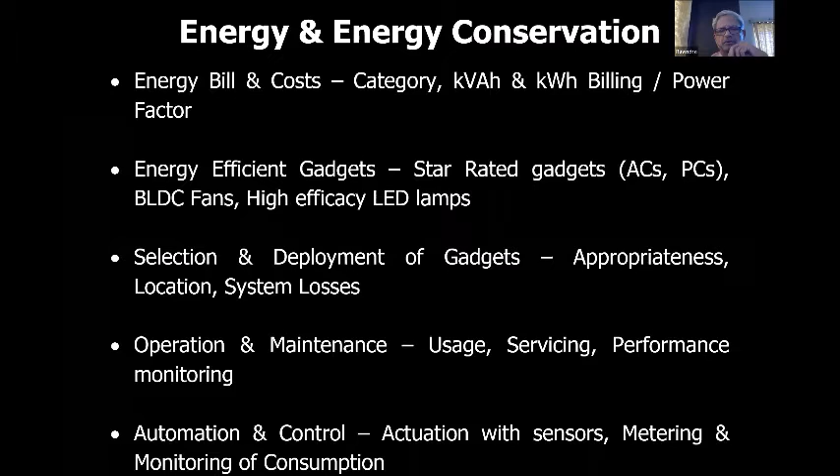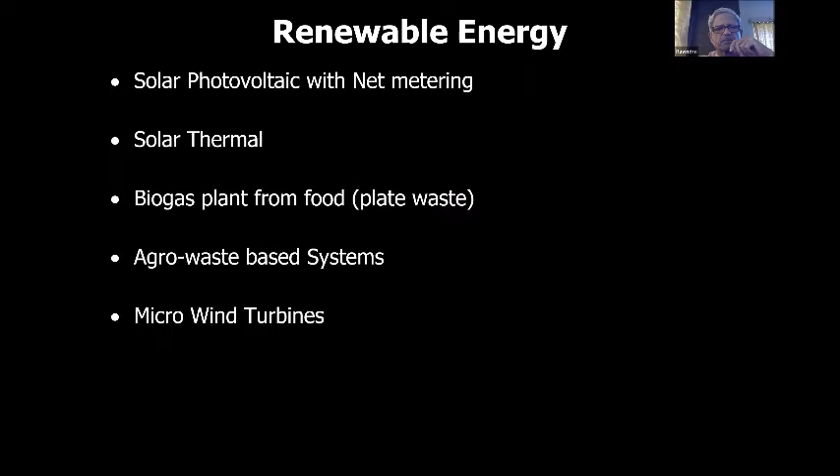The second part will be renewable energy. What is commonly possible for colleges, especially the smaller ones, is solar rooftop, solar photovoltaic. So we'll see that in a bit of detail. Solar thermal also is possible, but there is hardly any hot water application in colleges, but that also is an area which can be explored. Then we have biogas from food waste, agro waste based power generation or other systems, and micro wind turbines.

Then we'll see water and water conservation. Depending on the source of water, we need to have a proper purification system. We also need to check drinking water quality and arrangements. So we'll see that in some detail. There are a lot of gadgets available which consume less water.

Now, I'll tell you, there are some faucets available which consume just 2% of the regular water for hand washing. They're available on Amazon, costing about 1,500 rupees or something. But it is with a mist. It has a special nozzle which generates mist, and the entire hand will get wet with a very small quantity of water. You can also see the videos; those are available. I can also share that individually if somebody is interested.

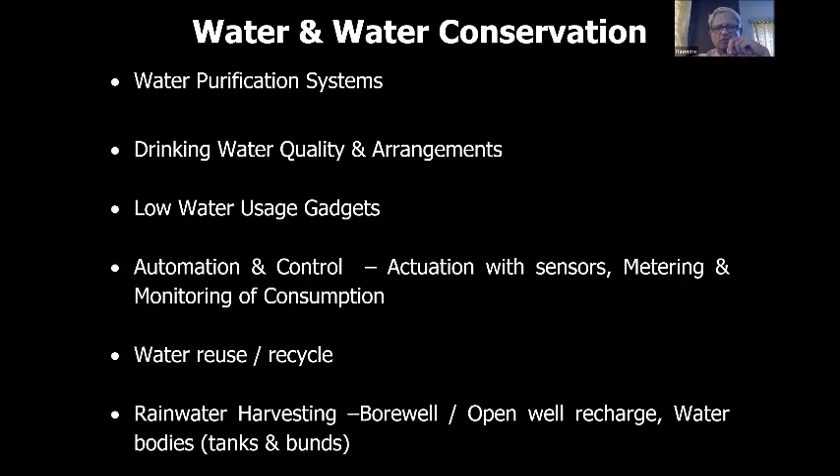The next part is automation and control. Similarly to energy, we can do it with some sensors, maybe for flushing, maybe for tank filling and other things. Then reuse or recycling of water. That is another area which can be looked at. The last one is rainwater harvesting. There are multiple possibilities available with which we can harvest rainwater and contribute to overall environmental improvement.

The environmental management aspect will have air quality and ventilation. Basically, this is for closed spaces as well as open areas, indoor and outdoor. The primary parameters are temperature, RH, CO2, VOC, NOx, SOx, SPM. The second aspect is illumination and lighting, mainly indoor, but also for roads and pathways, especially if it is a big campus. For smaller institutes not operating during nighttime, it doesn't make that much sense. But now many colleges have evening classes also, so that is an area where we need to look at illumination and lighting.

Now here I would just like to add one thing: in general, Indians are comfortable with lower illumination levels. If you see international standards and norms, even Indian standards, they talk about considerably higher lux levels than what we ourselves are actually comfortable with. So norms are more on the higher side. We are comfortable with lesser lux levels, and probably that's how it has been maintained also.

The third aspect is noise and sound level. Then general neatness and cleanliness, greenery and water bodies. Again, this is more relevant if you're talking of a campus. If it's a single standalone building, this may not be as relevant.

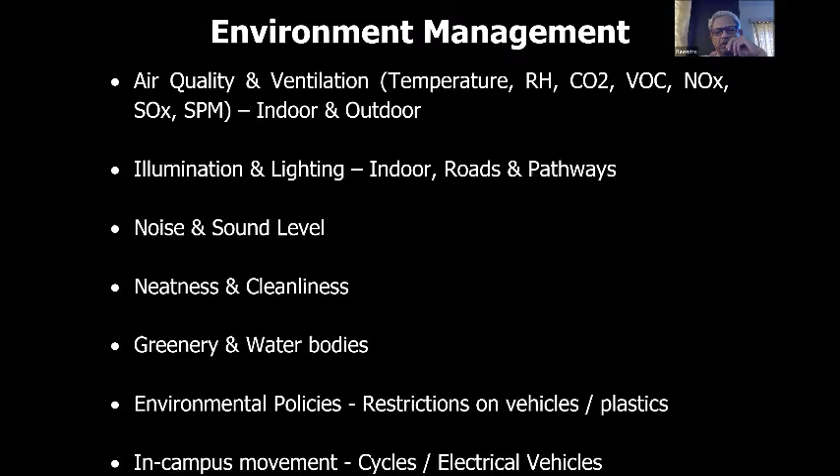Then the environmental policies followed in campus by the college, like whether you have a restricted entry for vehicles in some of the area, you don't use plastic, ban plastic in campus, or such kind of thing. Then whether in campus, if the campus is big, maybe you can have cycles, only cycles are allowed in specific areas, maybe electrical vehicles are allowed. Or maybe electrical vehicles are provided by the university or college, so that the staff or people do not use their own vehicles or rickshaws.

The other green initiatives that have been taken is whether you have a paperless communication, then whether we have got any awards or rewards, because there are now a lot of competitions, or there are a lot of areas where this kind of thing also can be seen. Then what are the environmental promotion activities undertaken by the college in-house and beyond, like for the public or society?

Then comes basically waste management. Now waste management is not much of a gaseous waste. Waste can be of three forms, either liquid, solid, or gaseous. So colleges normally will not have much of a gaseous emission because there's not much of a production going on. Apart from small labs, or maybe in some cases you have a pilot scale activity, a small quantity of gaseous waste effluent may be generated, but more or less it will be solid or water.

So there are 4 R's. We'll see that slightly in detail: review, reduce, reuse, and recycle. Then segregation and wastewater treatment. It is very essential to segregate the waste. We'll see that in detail. But basically, if you segregate at source, it becomes very easy to treat. If it is mixed and then goes to a larger volume, then it becomes a nuisance, like what we have in Mumbai.

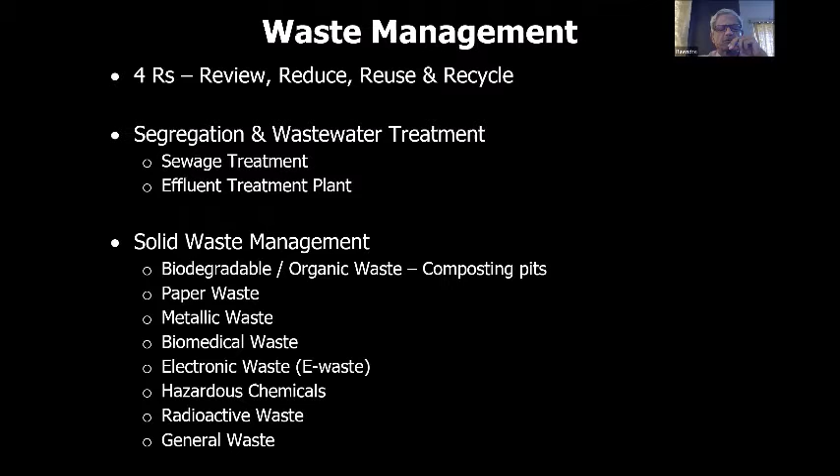So segregation and mitigation at generation or source is the best way of treating the effluent. So that way we will see for water as well as for the solids. And the last is infrastructure and safety, that is in-campus movement, entrances, whether from the safety point of view entrances are accessible, and wide enough for emergency evacuation. Similarly for staircases, pathways, then landscaping, this is basically a mix of everything.

Firefighting systems, this on safety side. Then whether we have any major safety manual, operating procedures, do you carry out mock drills, then building condition, general security and fencing. So these all will be covered in the course of our presentation. And this is basically a part of the green audit report, what is prepared and what is actually expected by NAAC. So we'll start with the energy conservation and energy.

As I said, basically we'll see the bills and cost first, because that's where ultimately we are all interested. Now, when I mean energy, mainly because we are consuming electrical energy, we'll focus more on electrical, because fuel is really very small, maybe for canteen or something. And for that, we only have to have a trade-off between cost and convenience. If you go for LPG, it's most convenient, most expensive. If you go for furnace oil or coal, it is not convenient, but it is cheaper. So that is where we have to have a trade-off of cost and convenience.

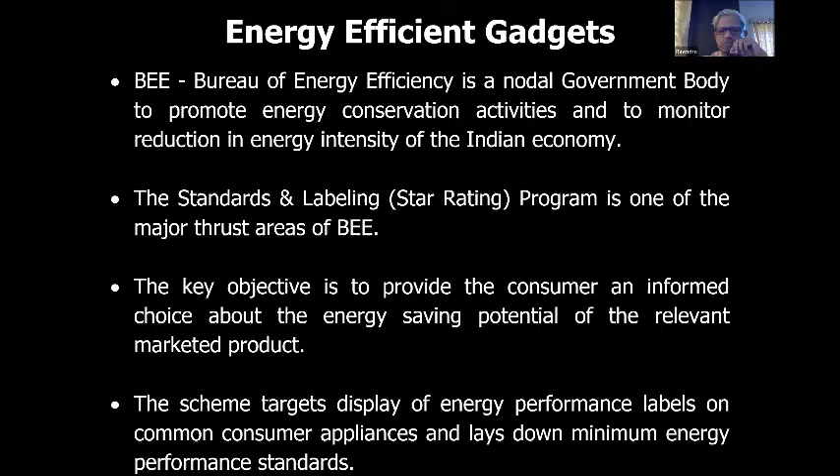So as I was saying, we should do the life cycle cost analysis. This is very essential when we are buying any machine or any gadget, because buying a slightly efficient equipment is not going to cost that much higher compared to the saving it is doing. I'll just give an example. We just take a case of split AC, 1 star versus 5 star. We are operating 10 hours a day and 250 days a year. This is a figure; you can change the values accordingly and the saving will change. Useful life of the machine, you consider 10 years. So for 10 hours a day, it will run 250 days in a year, for 10 years it will give service.

Now, whatever maintenance cost or servicing cost is there, it is going to be the same for both machines, whether it's 1 star or 5 star; it is not going to cost you additionally to service the machine. So I do not consider those costs. Power cost is 8 rupees. It will keep on changing, next year it may be more, but let us consider 8 rupees as a standard cost over a period of 10 years. So the cost of machine is 20,000 for 1 star and 25,000 for a 5 star. Now the difference is 5,000 rupees.

Now when we are buying, if we don't get a star rating label, we may not bother. Why should we buy a 25,000 rupees machine? We should buy a simple one. It is costing less, it looks equally good, it is from the same company. And mind you, these star gadgets are made by the same company. It is not that only Daikin will make 5 star and Voltas will make 4 star. Voltas will make 4 star, 1 star, 2 star, 3 star. Daikin also will do that because they want to cater to all the market. There are people who want to buy a cheaper one, and people who want to buy an efficient one. So each manufacturer will have a complete range of products.

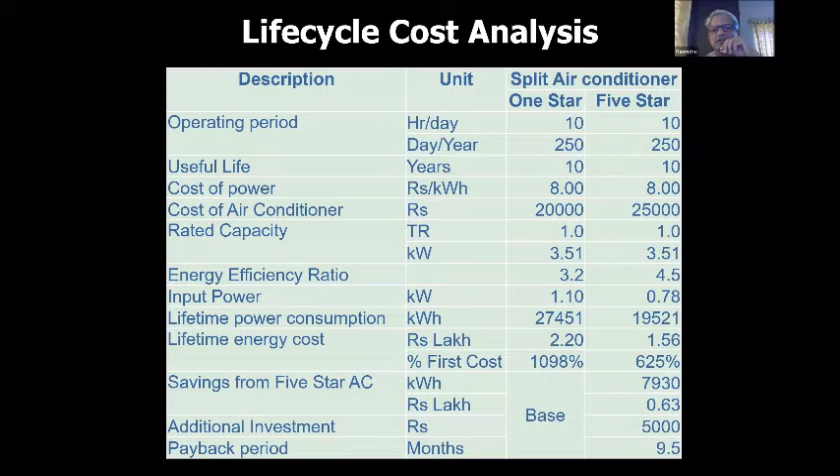You can still buy a one-star machine after doing all this, but then it is your informed choice, knowingly done: okay, I know I'm going to spend so much more, but I don't know whether I'm going to use it 10 hours for 10 years or not, so I still want to buy one star. You can take a decision, but this is with knowledge. It is not a decision by ignorance. It is a decision by a learned person. That's why the BEE star rating one needs to see when we are buying anything.

Now this is available for many of the products, but I have listed down which are relevant to us. These are mandatory. When you are buying lamps, refrigerators, air conditioners, geysers, TV sets, it has become mandatory that the star rating has to be done. The product cannot be sold without star rating. Even if it has one star, it is okay, because one star also has a minimum value. If the efficiency is below a lower threshold value, it is not sold in the market. It is not available in the market.

So these gadgets cannot be sold without the label. And you see now LED, like people say, okay, we are going to buy LED. Now there are a lot of companies, the locals are there, Chinese are there, Philips is there. Now, how to differentiate? So when we are buying a lamp, the differentiation can be based on what is the efficiency of the lamp, what is the star rating, what is the lumen output per watt. It's called efficacy, lumen per watt. That is all available now with the label.

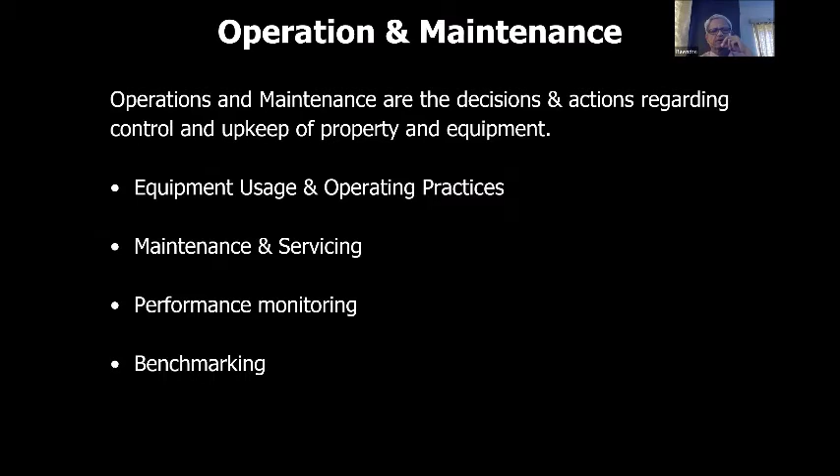How much is it consuming and how much should it be, compared to yesterday or compared to the same period last year? What is the consumption now? Is there any variation? Is there any increase? Because any deterioration in equipment or any system will lead to more energy consumption, which ultimately will be seen in the billing. This is why metering and regular monitoring of consumption is essential. And it really can help in a big way.

Now, I'll just give a small example. We did an audit for a corporate house. The entire building had a centralized air conditioning system, and the normal office timings were 9 o'clock in the morning to 6 o'clock in the evening. As part of the audit, we had an energy meter installed on the main incoming, and we carried out 24-hour logging of the power consumption.

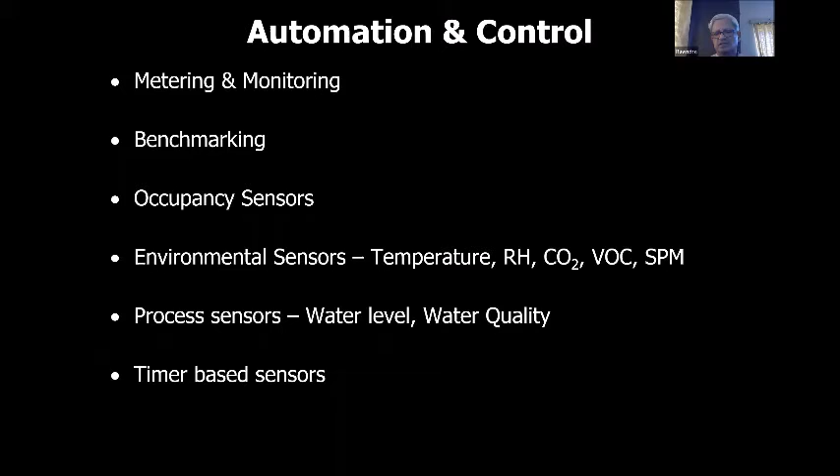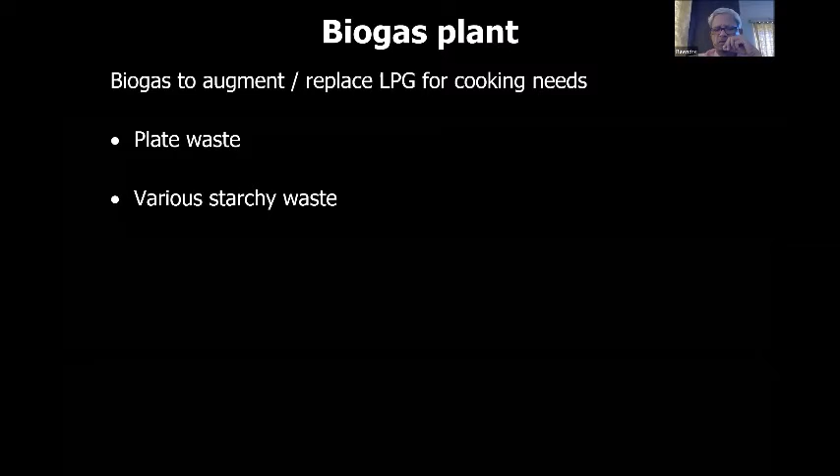But in case it is there for whatever reasons, then biogas becomes feasible. Otherwise, biogas is not recommended here. This is also basically for huge, big campuses. We do not have it for regular colleges.

And this, being renewable energy, will also qualify under that category. You can also make charcoal from these dry leaves. There is a process through which you can do that, because it has a good amount of carbon. So charcoal also can be done. And if this agro waste is really huge, power plants are also available, but a power plant is not something for colleges.

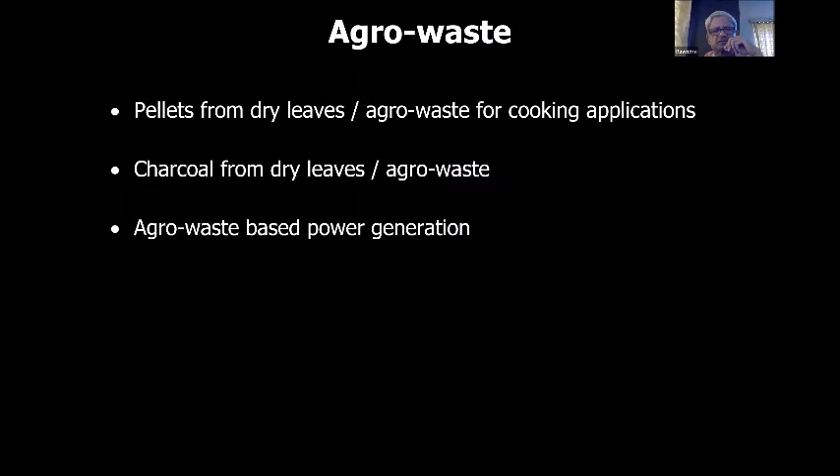There are micro turbines available from 1 kilowatt to 10 kilowatt, or even smaller, but they may not be economical unless there are specific applications where you need only 50 watt or 100 watt. Then those turbines make sense, because smaller the machine, the economic payback becomes more and more.

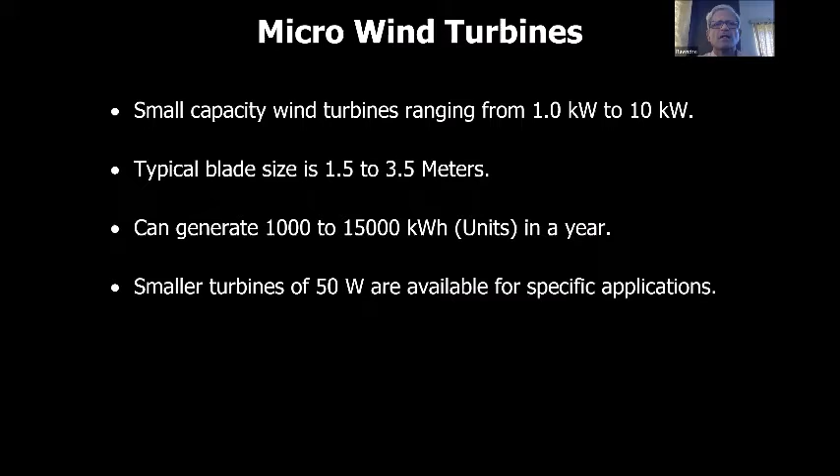But people have that concept of green buildings and all. They think of having this micro turbine on the terrace, so that some power gets generated and your overall carbon footprint is reduced. So for them, there are 1 kilowatt to 10 kilowatt, 500 watt, 400 watt options also available, but the blade size is 1.5 meter to 3.5 meters. Typical generation could be 1,000 to 15,000 depending on the capacity and wind velocities. This is also not very attractive, but this is one area we can consider.

The next is water and water conservation.

Water purification is the first thing they consider, what is the quality of water. That's one of the areas where we need to focus, and purification will depend on the type of source.

If you are having municipal water, like Mumbai, now they have declared that Mumbai tap water is safe for drinking. Although many people have their own reservations, more or less it is quite good and can be directly used for drinking. But other municipalities may have some TDS higher, or some other reason. So depending on from where the water is coming, the purification system will depend.

Now the major impurities include microorganisms like bacteria, algae, fungi, viruses, pyrogens, dissolved inorganic compounds, that is what we call TDS or dissolved salts. Then dissolved organic compounds, this is basically in very small traces, but they are equally harmful. So we have to have removal of organic compounds.

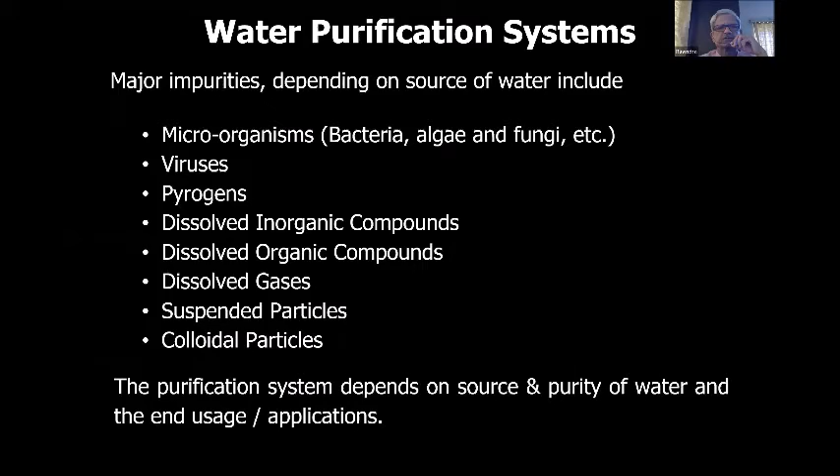The second is the drinking water quality and arrangement. Now, normal water and drinking water, of course, you need a better quality. So maybe you have RO purification system. So what is the system for drinking water? Then the accessibility and availability of drinking water, that also is a part of the green audit initiative, whether students have to walk a lot or maybe the water is not available at convenient locations, then that also need to be addressed.

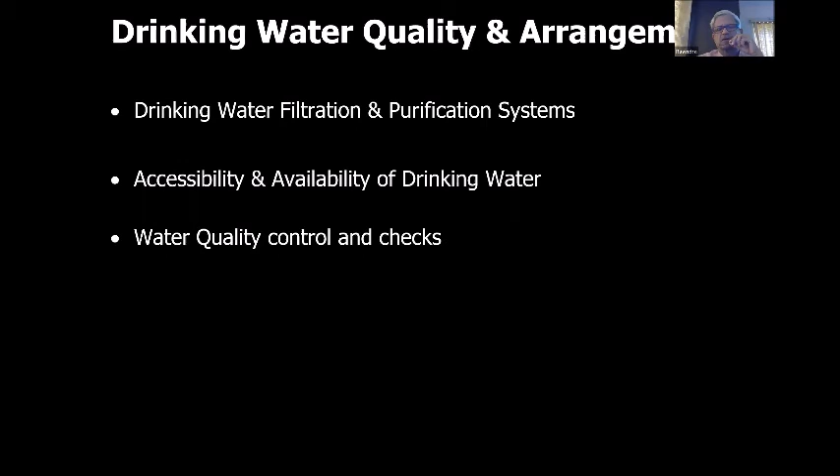And control and checks, as I said in the earlier slide, periodically we need to check the quality control. What is the water quality of the incoming? What is the quality of the drinking water? So that water quality is maintained.

Another part of low water usage is you have to go for low usage gadgets. There are a lot of water gadgets available which consume less water. As I said, even there are low flow toilets available which will consume 30 to 40% of the normal water. And mind you, toilets and flushing is one of the major consumers of water in any common facilities. I've seen some college audit reports where toilets consume almost 20% of the water, whereas urinals consume 10 to 12% of the total water.

So there are waterless urinals also available. They are a bit expensive. Maintenance is more, but that aspect can be seen. And as I said, for the basins and faucets, there are a lot of fittings available, and there is a continuous improvement in this area, which can reduce the water consumption.

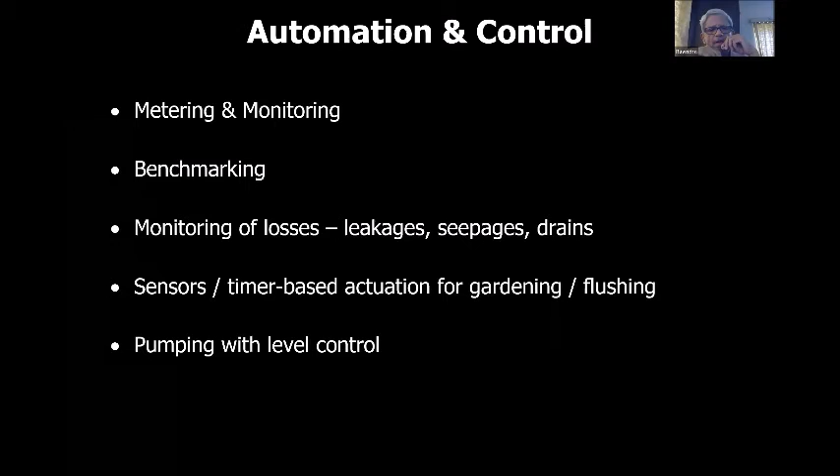Then there can be sensor-based or timer-based actuation for gardening, flushing. That is also possible. That is something which will save on energy and water. Pumping with level controller, that I said earlier.

Then there is reuse, recycle. This we'll see in waste also, but reuse is basically without any treatment. You can reuse that water without any treatment; that is reusing. If you treat and use it, then it is recycling. Recycle paper, recycle water. So if you send water to the STP, sewage treatment plant, and after that you use it for flushing or gardening, that means it is recycling.

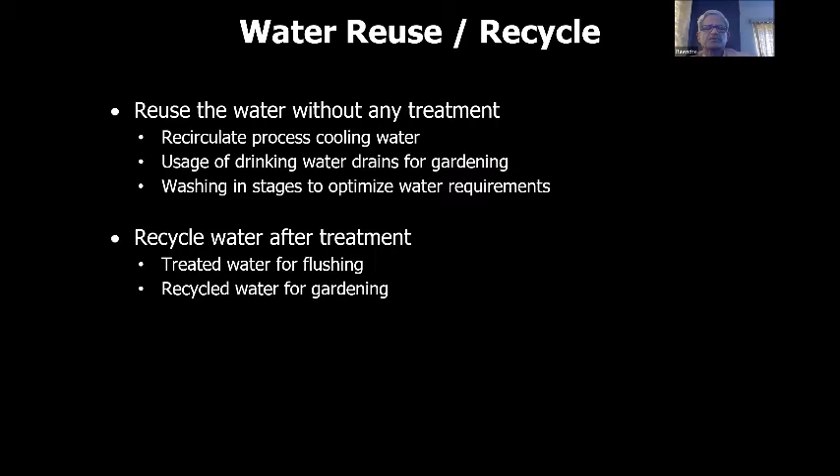But if you just collect the drain water or maybe water from the cooling, you have some small application and use it for gardening or anything, then it is reuse. You're using water which is already used somewhere; instead of throwing it, you're using it for some other application. That is the difference between reuse and recycle.

Then rainwater harvesting, this is not as relevant to Mumbai as to other areas. In Mumbai, 10-15 feet below is the water table, and we cannot have anything done. We should only allow it to go through the soil. Because with concreting everywhere, it has become a problem. There's no way the water can seep into the ground, so it is just flooding the entire area. So rainwater harvesting is only to control the flooding, not for anything else. But in other areas, it will make sense.

So rainwater harvesting: one is you can harvest, store the water, and use it for your normal requirements throughout the year. This is possible where the rains are less and water availability is slightly difficult. You might have seen in Rajasthan, there are a lot of TED shows and YouTube videos on that, the houses have a storage beneath, and they are able to use that water almost throughout the year. I think somebody in Nagar also had done that kind of thing.

So you store it and use it throughout the year for cooking and drinking applications, because the rainwater is pure. It has no impurities. You should let the first few rains' water drain, because it will have some suspended particles. It may have some dissolved gases from the atmosphere. But after 2-3 rains, the terrace is also clean, the air is also clean. So subsequent rainwater can be stored in a tank, and with small purification, depending on the requirement, it can be consumed for all applications, including drinking.

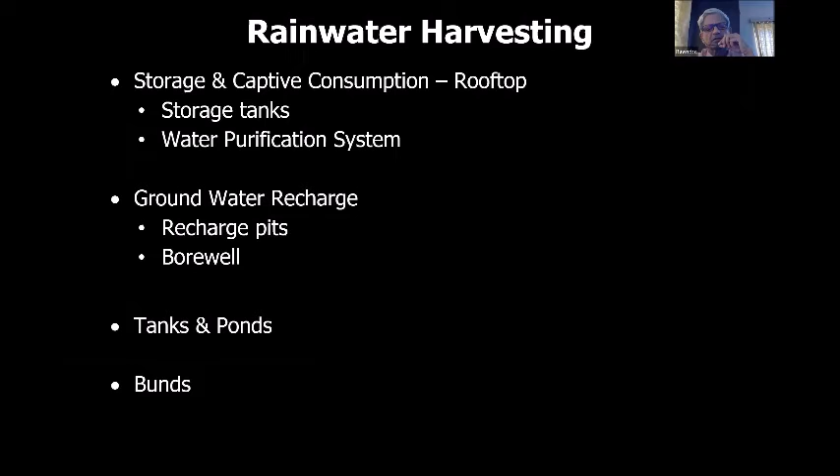Bunds are similar. Basically, bunds are also for groundwater recharge. A bund will hold the water, and once you hold the water for a longer time, it will have more and more seepage into the ground, and you will improve the water table.

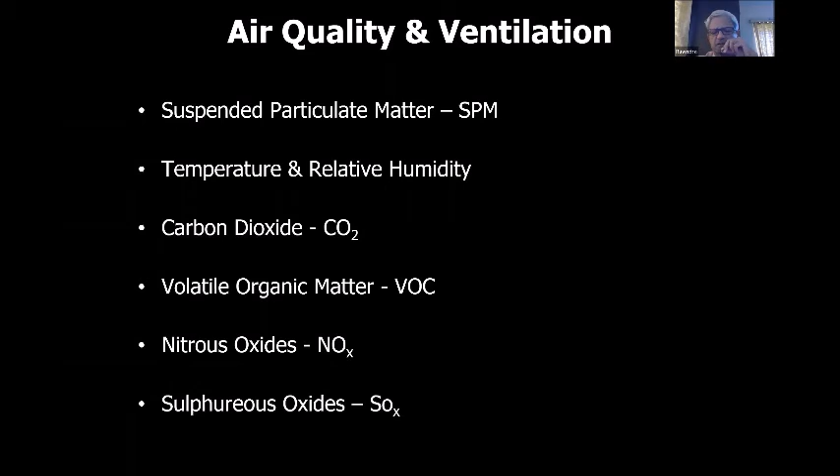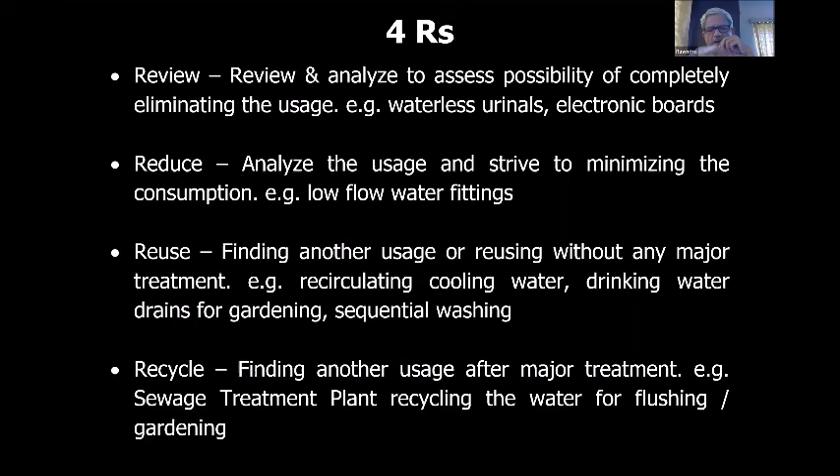Now, as I was saying earlier, segregation basically is the best strategy, because if you segregate at the source, your overall load at a city, town or country level comes down drastically. Now we have some water usage. All the water doesn't have the same level of contamination. But if you mix the water, it will have a strange contamination level, which will become very difficult to treat.

So for solid waste, what happens if you segregate the waste? Organic waste can directly go for composting. Organic waste has 70-80% water, so it can go to composting, and that much load is reduced on the overall waste management system.

If it is mixed and the entire waste goes to the municipal sewage or municipal solid waste plant, it becomes very difficult for treatment. So reuse the less contaminated water or solids so that your total waste generation is reduced.

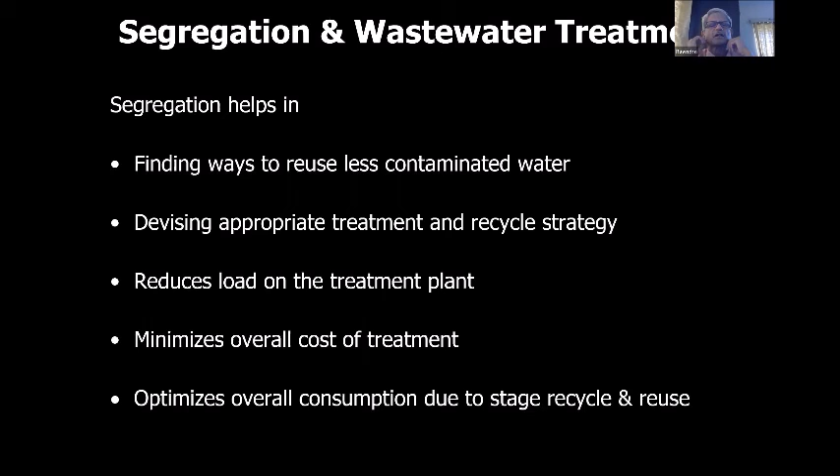When the load is reduced, the cost also comes down, and overall consumption gets optimized due to recycle and reuse strategy. So overall water saving, cost saving, and treatment load reduction will be there. Of course, we need to consider economics while doing it, but this is the way forward.

Similarly, for solid waste, you have different kinds. The most common is organic or biodegradable waste. At institute level, I think most people are doing it. If they are not doing it, they should do it.

Go for a composting pit. You can have two sets of pits - one fills, then you leave it like that for some time. Even that filling will take a lot of time, because as I said, 80% is water, so within 2-3 or 4 days that water vanishes and the level doesn't rise.

So filling the biodegradable pit itself takes time, and then you leave it for 45 days so that you have compost which can be used in-house for planting, or it can be sold. Paper waste can be segregated and recycled, sold separately, or you can make handmade paper objects if somebody has interest. Metallic waste can be sold separately.

General waste is disposed of as per the norm - it's something which cannot be classified or sold separately. Hazardous waste is to be disposed of through a designated agency, or you can have your own hazardous disposal system, like incineration for biomedical waste.

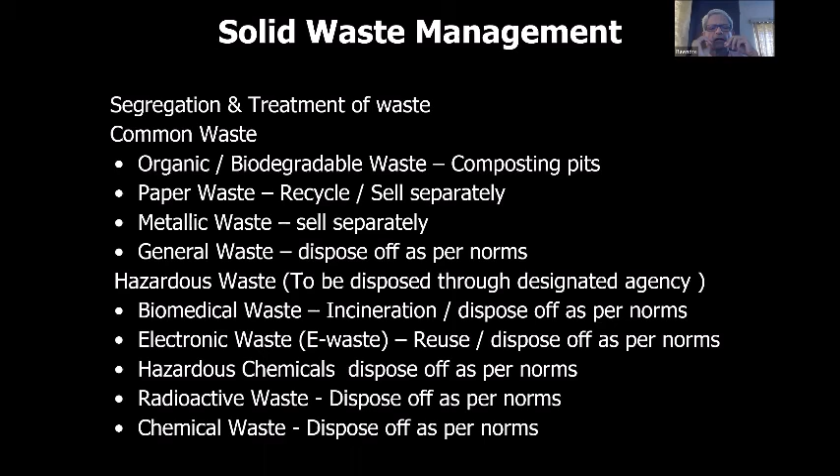It should not be mixed with other hazardous chemicals like radioactive waste. It is not so common for colleges, maybe a few medical colleges doing research may have it. Accordingly, it should be disposed of.

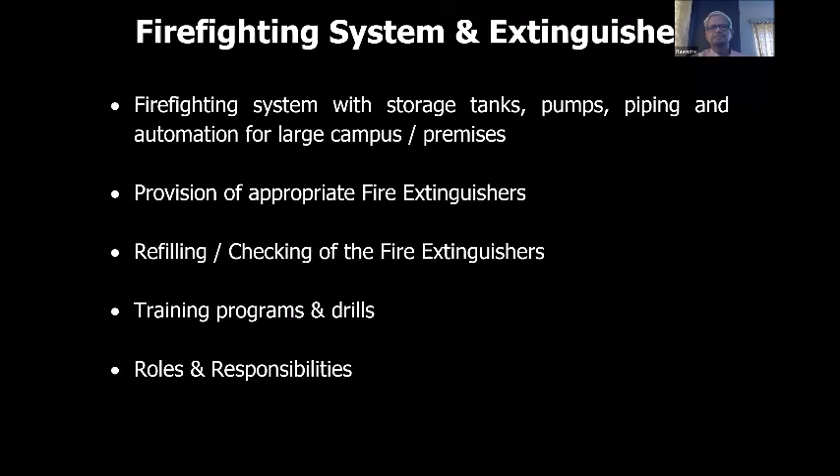Safety, fire is also part of safety, but it is taken separately. There should be a safety manual for other kinds of things, SOP, standard operating procedures - if this happens, what should be done. Then roles and responsibilities, a public address system to make people aware, and mock drills, similar to fire, on the same line.

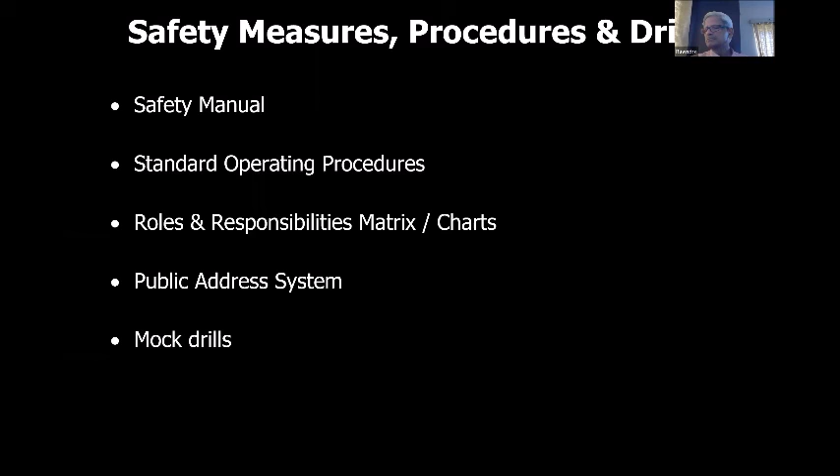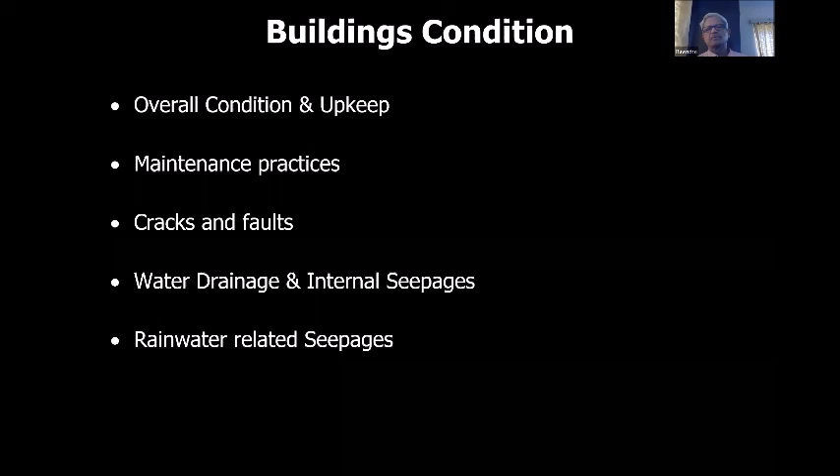Overall building conditions and upkeep is also part of the green activity. Not so relevant, but maintenance practices, faults and cracks, water drainage, internal seepages, rain-related seepages - these kinds of things should not happen. So overall maintenance of the building should be good.

So with this, I complete the session. Any questions or doubts, we can discuss that now.